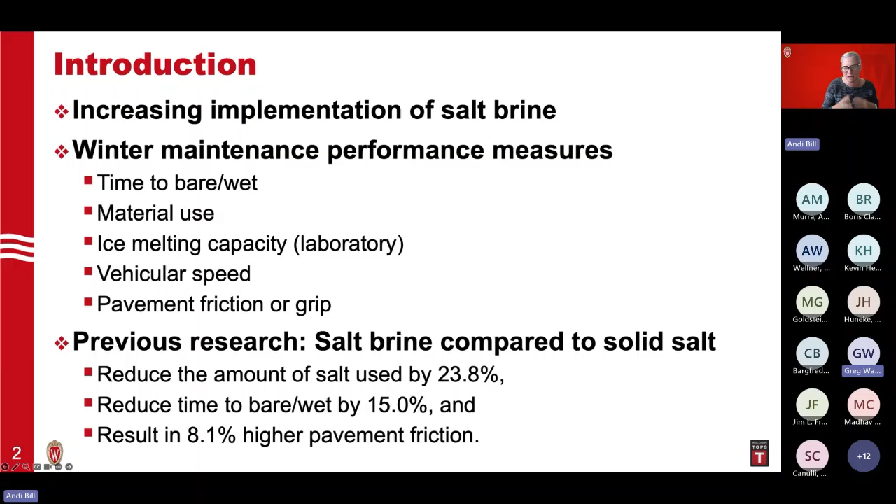Through our previous research, we know that salt brine compared to solid salt reduces the amount of salt used by about 24%, reduced the time to bare wet by about 15%, and resulted in about 8% higher pavement friction. These are mostly laboratory experiments that have been done in the past. There have been some field-based studies, but it was limited.

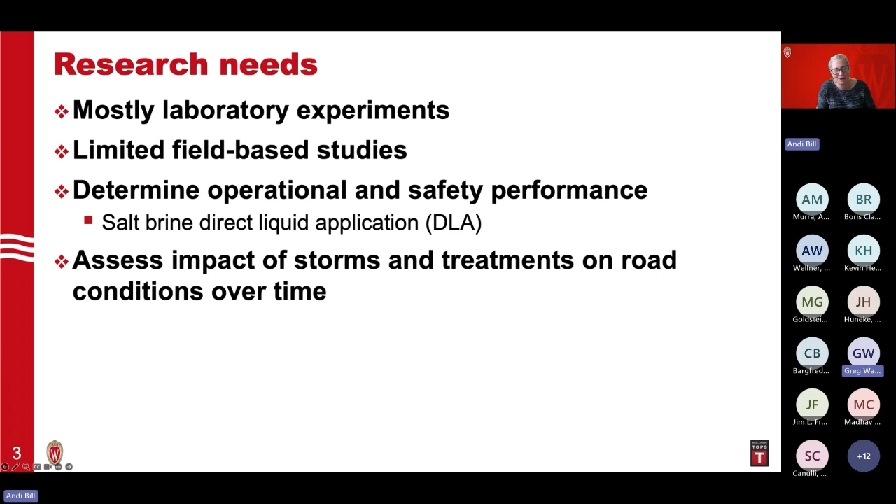And then determining the operational and safety performance of salt brine direct liquid application, DLA. We wanted to assess the impact of storms and treatments on the road conditions over a specific amount of time. Storms don't all just come at once, they go over a period of time, and so do our treatments, so we're looking at those through that time process.

So we had two parts where we compared salt brine DLA with solid salt. The first part was a literature review and agency survey. Thank you to those of you on the call that participated in our survey. Our research cannot be done without you participating. So we collected and synthesized information about differences of chemical materials, performance and safety metrics that are currently being used.

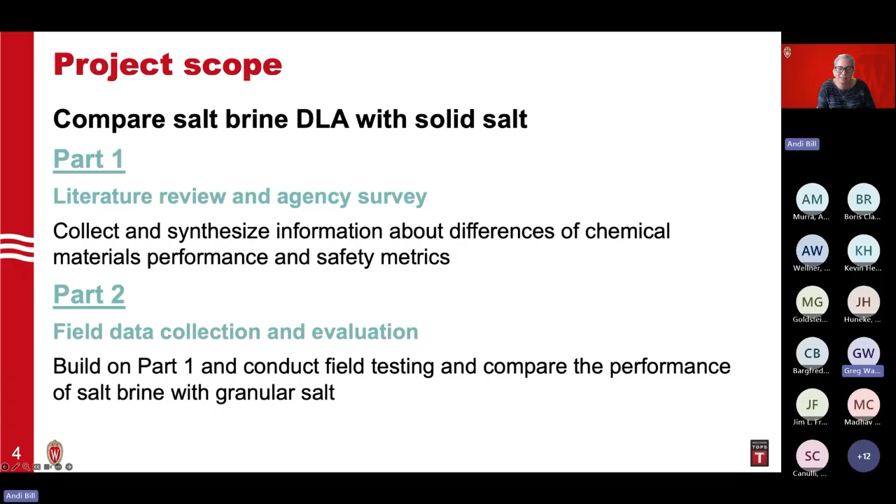Part two was a field data collection and evaluation. This built on part one. So we have the information that we're looking for. We want to go ahead and then conduct the field testing and compare the performance of salt brine with granular salt.

So we had our Clear Roads Technical Advisory Committee approve us moving forward with part two and help us throughout the process. Much gratitude to our Technical Advisory Committee for meeting with us throughout this project. So I'm going to take some time and go through our task one, our literature review, looking at winter storm impact, performance measures, and previous survey of practice.

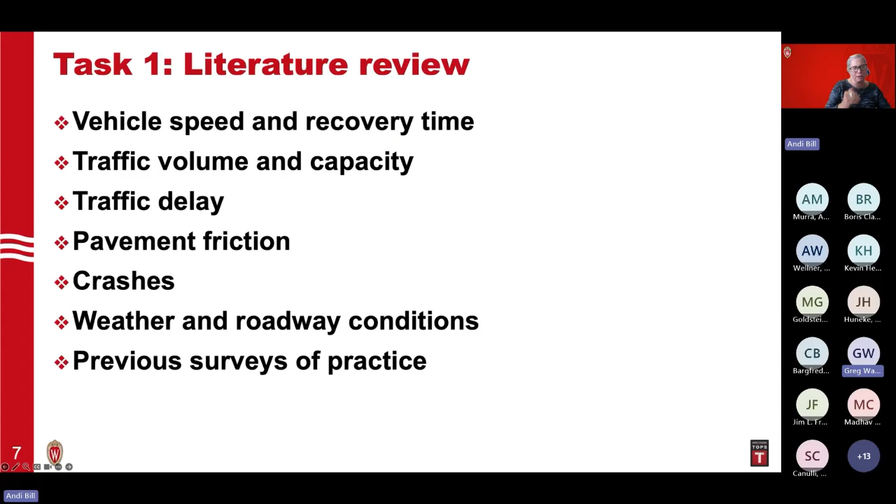So as we think about this, we looked at our vehicle speed and recovery times. We wanted to capture that, traffic volume and capacity, traffic delay, pavement friction, any crashes that were looked at through those winter storms, and then weather and roadway conditions, and then previous survey of practice. So we had all of those in our groups, spending some time to think about all of the literature that goes into each one of those topic headings and looking at it.

We asked, are you willing to share your data? So, what data are you collecting? Are you willing to share it? We had 16 responses that said yes, 10 that said maybe, and we didn't have any that said no. So that was a good start to that process.

The key finding is the most common use of salt brine direct liquid applications on the anti-icing. As we think about de-icing, thinking about DLA, pre-wet salt, solid salt applications, and then the shake and bake is a little less common. From an experience standpoint, the most experience was on the pre-wet salt. DLA, while it's definitely becoming more of a practice, is relatively less experienced still at this point in time compared to pre-wet salt.

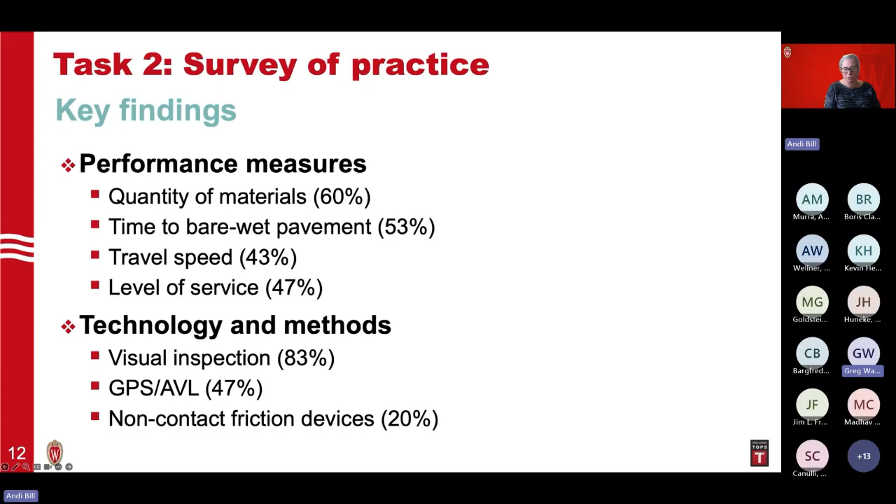When we asked the question with regards to what technology and methods you're using for these performance metrics, 83% said visual inspection, 47% used some sort of GPS AVL. 20% have non-contact friction devices that we'll look a little more closely at later on.

From the metrics monitored standpoint, we have 70% that looked at measuring that roadway condition. What are we seeing out there? 57% level of service, 50% traffic flow and speed, 50% safety, and 50% amount of materials used. And then this gets back to our willingness to provide some of that data through that survey.

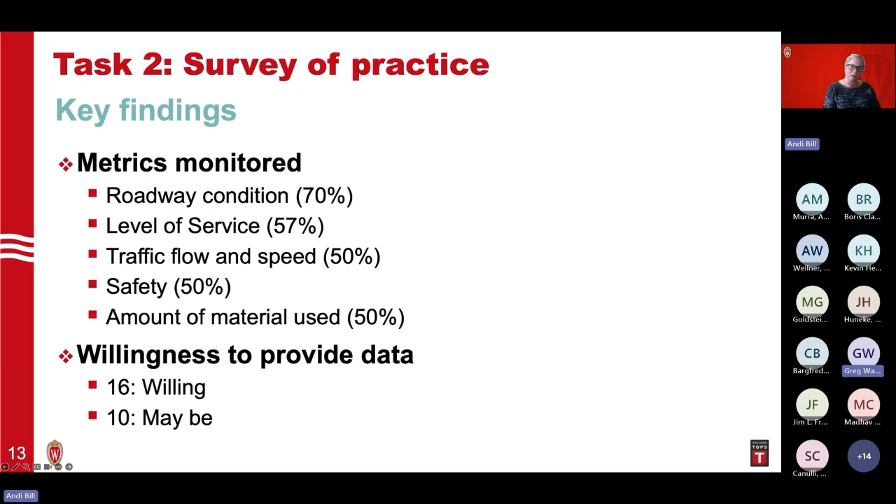As we moved on to task 3, this was looking at our field testing protocol. What are the methods that we're going to look at? Looking at our study and control routes, which I'll give a little more in depth, and then looking at the road weather information system and the AVL data, RWIS and AVL.

So our methods, we looked at 2. There's a study and control route comparison. This is going to be looking at a divided roadway, so it's under the same conditions. We're going to do salt brine in one direction and then solid salt in the other direction. We use the AVL data. We also collected friction measurements, vehicle travel speeds, and other performance measures for this comparison.

The other method that we looked at was the RWIS station data. We gathered friction data, AVL data, and looked at a time series for that RWIS, which I'll talk a little bit more about as we get into the data side of it.

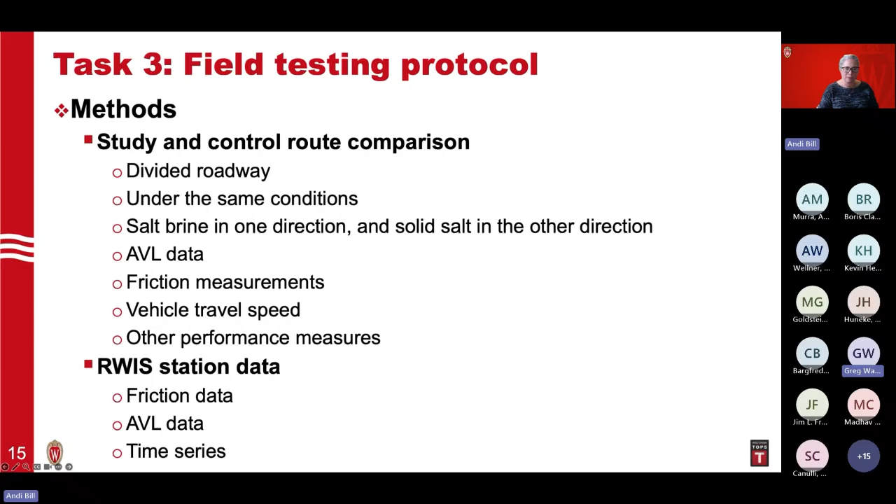So our required is our route information. What is the start and the end routes? This will be done just one time. What is the ADT, number of lanes, functional classification? This just kind of gets us started on it.

For the treatment, this is going to be done every storm. So our required for this is whether it was anti-icing or de-icing, the materials used on that. And then our desired was amount used and application rate, frequency of application, and that GPS AVL.

For each storm, we wanted to think about the storm start and end time. And then if we can, that pavement temperature at 60-minute intervals or range for every storm, air temperature, type of precipitation, and precipitation amount. The required for this was the start and end time and the pavement temperature. Then we had some desired as well for the rest of them.

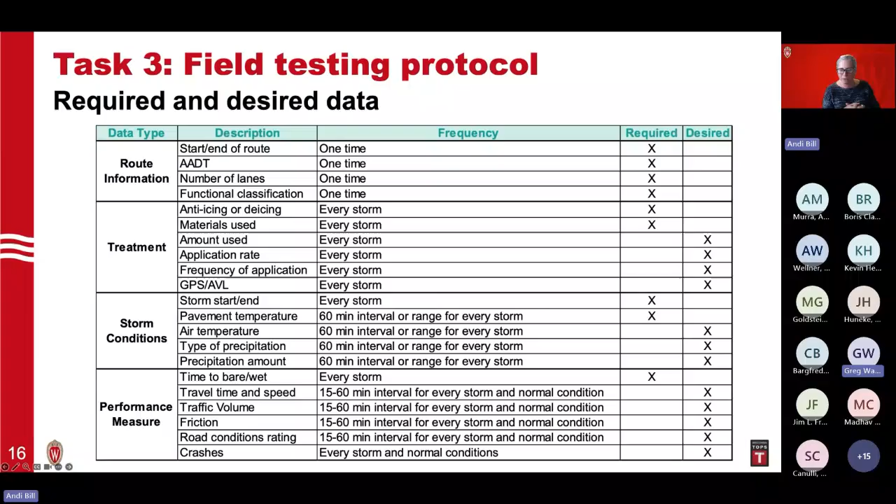In terms of performance measures, we looked at time to bare wet. We got that for every storm. And then our desired were the rest of them here. So travel time and speed, every 15 to 60-minute intervals for every storm, and the normal condition as well, so we can compare it against something. Traffic volume, friction values, road condition ratings, and then crashes within that. So looking at the storm and then also during those normal conditions.

So we used the survey of practice, and we reached out to those folks that said they were interested in maybe sharing that data and working with us. We also looked to agencies with known application of salt brine. And our Clear Roads project manager really helped with our outreach effort. These are our list of contacts that we went through.

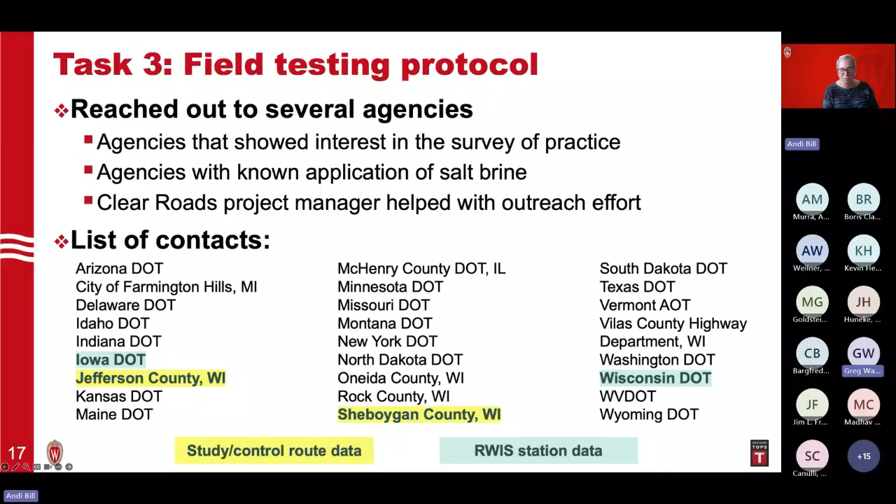So we used our RWIS station data from Wisconsin DOT and Iowa DOT. And then we did 2 study and control route data that I'll go more in depth with, Jefferson County and Sheboygan County here in Wisconsin.

So I'm going to go through the field data collection. We're going to be talking about our study and control routes, what those look like, and then looking at our RWIS sites. As mentioned already, our study and control routes were in Jefferson County and Sheboygan County. The materials that we used were salt brine on one side and solid salt on the other. And our performance measures were application rate, vehicle speed, friction, and time to bare wet.

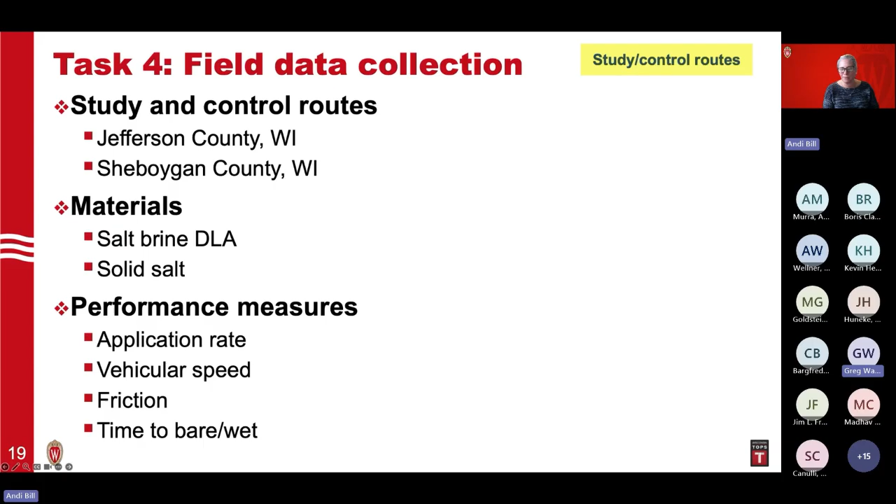This was our Route 1 here in Jefferson County. It's the Rock County line to Old 26 Bridge. It's about 3 miles long. You can see it in the bottom right-hand side. That's our map for that 3.3 miles. You can see the start and the end on that side. It is a 1 truck capacity. Brine is 800 gallons. The solid salt's 14 to 16 tons.

You can see in the picture, in that red call-out box, where we had solid salt on the black side, and then on the pink side is our salt brine. So again, under same conditions, one side of that divided highway is putting down solid salt, and the other salt brine. For our data collection, we used the MARWIS friction device. The data is auto-uploaded via cellular connection, and we had 5 storms that we looked at on this route.

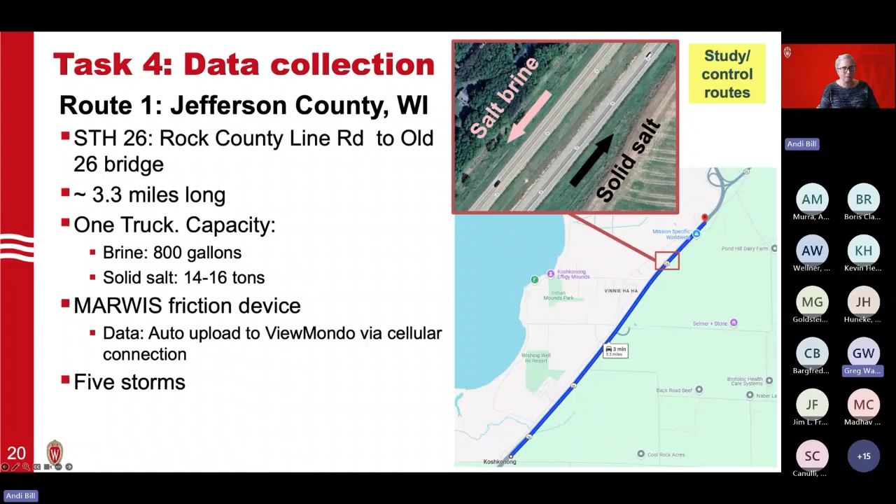For our Route 2 in Sheboygan County, this was located on State Trunk Highway 23 between County Road P and County Road O. It's approximately 3 miles long again. A patrol vehicle was equipped with a MARWIS friction device, and data was automatically uploaded as well to the same site. For this site, we collected information for 6 storms.

So you can again see the map there. And then in the bottom, you can see our solid salt is on the top of our picture here, and the salt brine on the bottom of the picture.

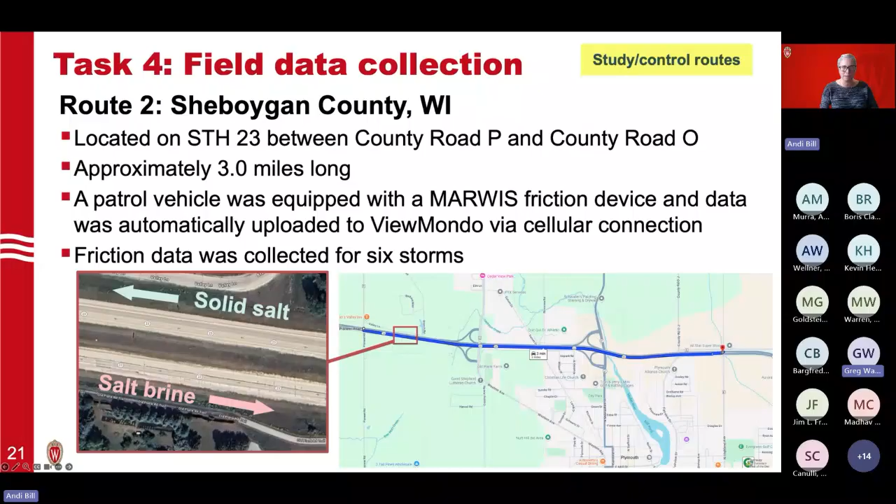So for these routes, we had online storm reporting data. Thanks to everyone that's able to help us. I know that data collection is a hard part. We can't do any of this work without you guys to be able to look at this data.

The online storm report data has the following information: storm start and end times, dates, type of precipitation, accumulation in inches, roadway surface conditions, pavement temperature, 23% sodium chloride brine in gallons applied, salt brine application rate in gallons per lane mile, solid salt dry in tons, solid salt pre-wetted in tons, any pre-wet agent, solid salt application rates, application frequency, the time to bare wet accomplished, and any comments or file uploads.

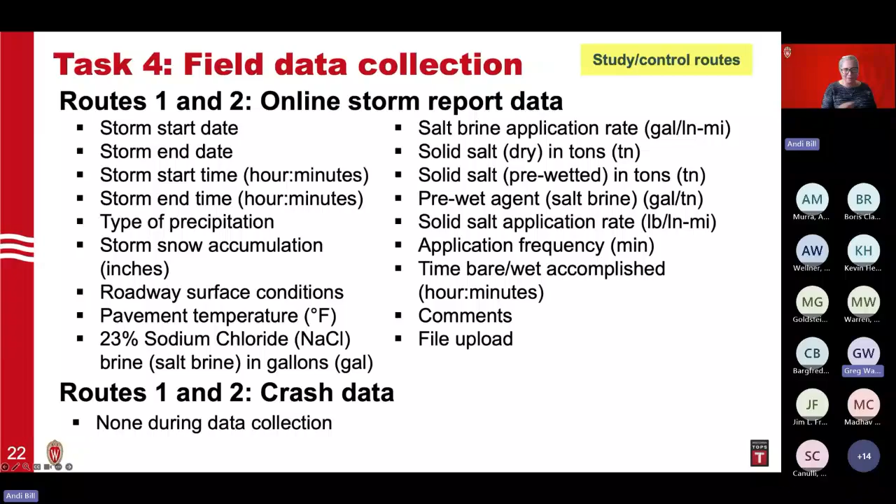We did want to look for crash data. Lucky for us, there was none during that data collection, so there was no crash data at this point to look at. That's good from a safety perspective, a little harder when looking at some of this other work, but I'm glad we didn't have any crashes during the data collection.

Here is the MARWIS system, an advanced road weather information sensor. It's put onto the back of a vehicle, a patrol car, or a truck, depending on the setup. There are pictures on the right. It has temperature and humidity sensors, status LED, connection plug, pyrometer, 4 transmitters and 2 receivers, and that's how it all works.

This is able to give us an equivalent friction value. Obviously, we're not doing a skid test on this roadway—we're doing it through these information sensors—but it's able to at least let us compare relatively against each other to look at that.

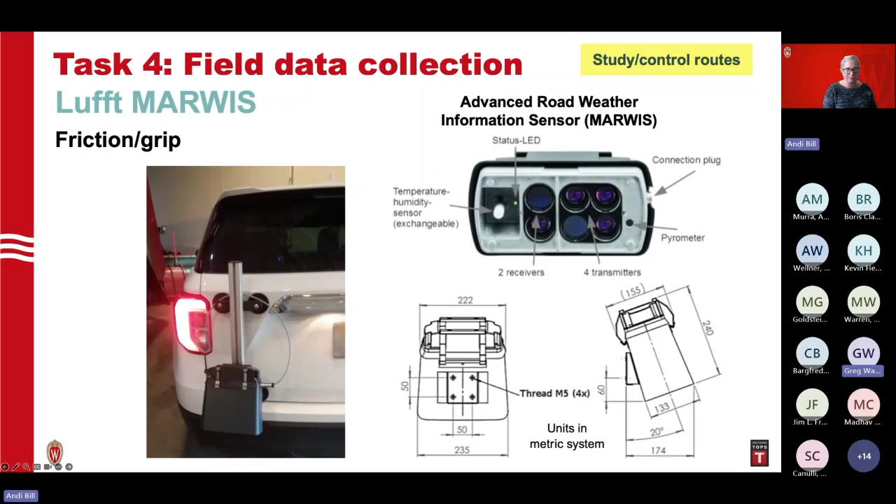As we moved into our RWIS stations, for Iowa DOT we had the 2019 to 2023 winters. We're able to look at those. We have RWIS 24 in Iowa City on I-80, RWIS 5 in the city of Ankeny on I-35, and RWIS 71 in the city of Grimes on Iowa 415.

For Wisconsin DOT, we had the 2024-2025 winter, with 4 stations listed: the village of Hortonville, State Trunk Highway 15 at County Highway JJ; the city of Appleton, I-41 at State Trunk Highway 441 southbound; the town of Tipler, State Trunk Highway 70 at State Trunk Highway 139; and the city of Green Bay, I-43 at the Leo Frigo Bridge.

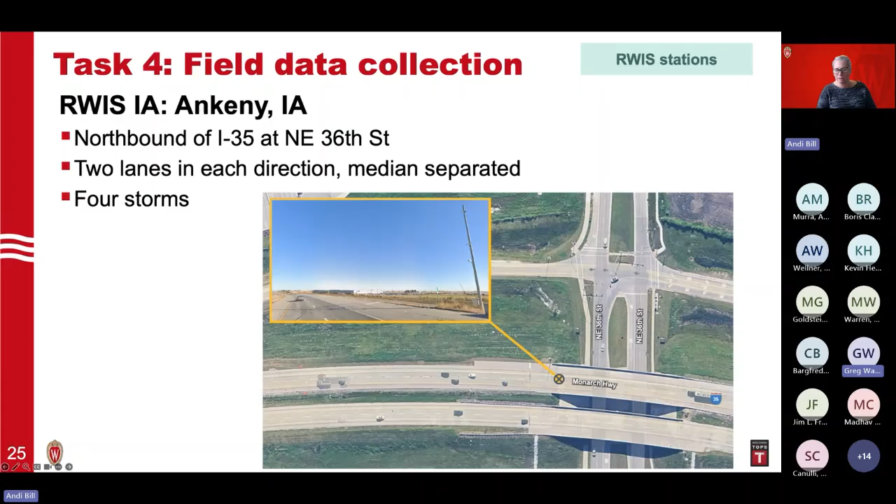Here you can see Ankeny, looking at it on the Monarch Highway, with the picture and call-out box from overhead Google Maps. This is northbound I-35 at Northeast 36th Street, 2 lanes in each direction with a median separated. We had 4 storms that we looked at for this location, which we'll talk more about on the data side.

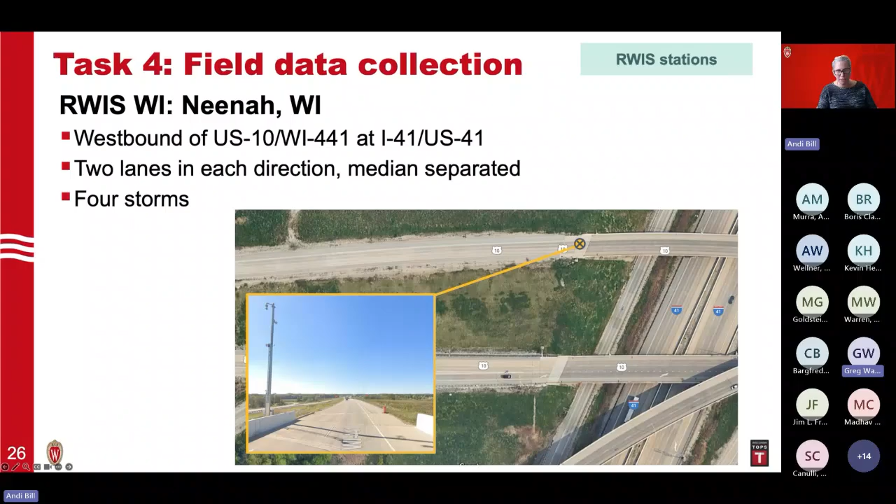In Neenah, we're able to look at this location—westbound US 10, 2 lanes in each direction, median separated again. This also had 4 storms. You can see the location right next to the bridge on this side.

As we think about the RWIS station information, we want to highlight the date, time, friction, ice percent, and surface temperature. Those are the major data points we used, but there's other data associated with it too. Hopefully as you're thinking about this from your area, you're getting some information about how you can use this, and if you have opportunities to look at data through your own RWIS stations, hopefully this helps.

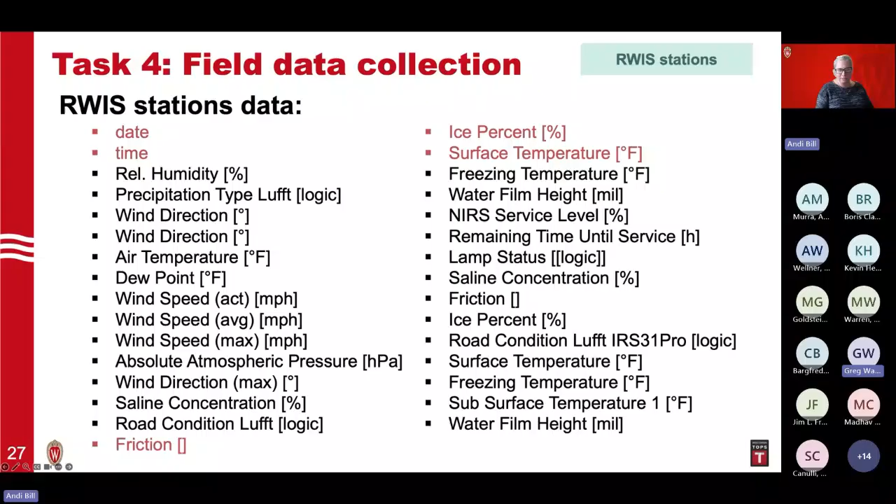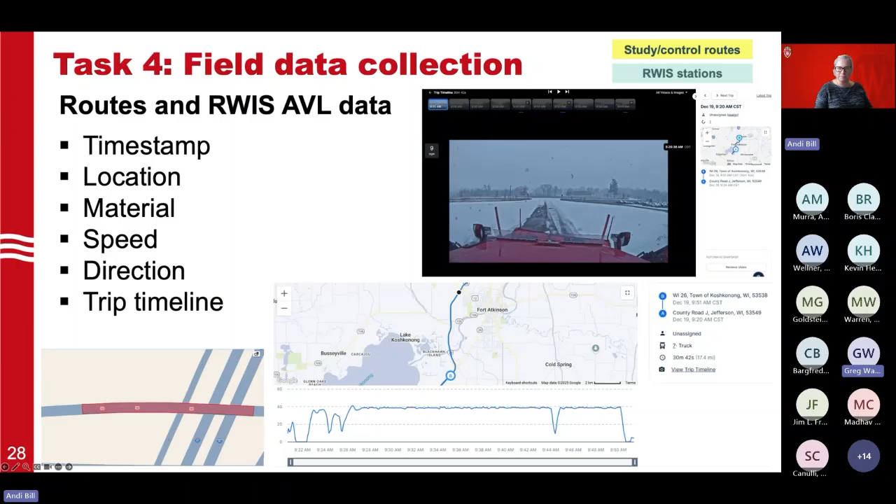So we did our method, we looked through, talked to a lot of folks, tried to make sure we got things set up a little bit, gathering all the data, working with everybody to make sure we're comfortable on what data is being collected and how we're collecting it, why we're collecting it. Those are really important things. That kind of helps with that buy-in and that feedback loop.

And then once we have that, moving into our data analysis. So I'll start with the study and control routes and look at it.

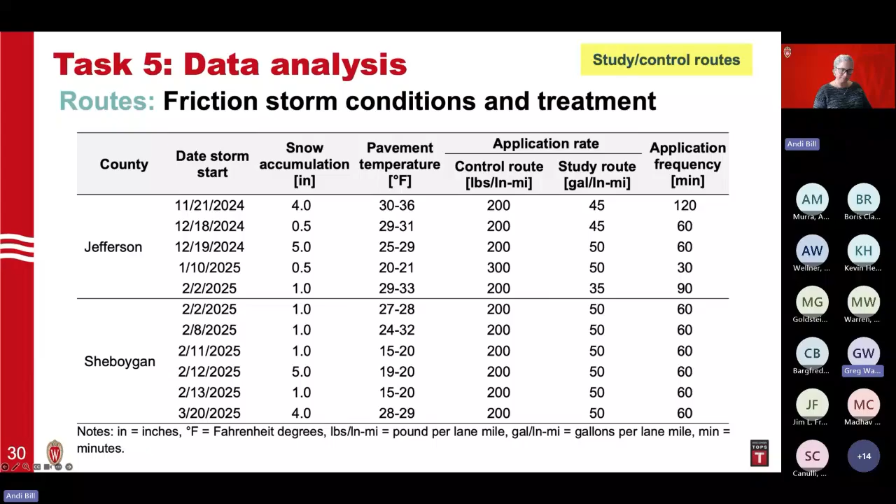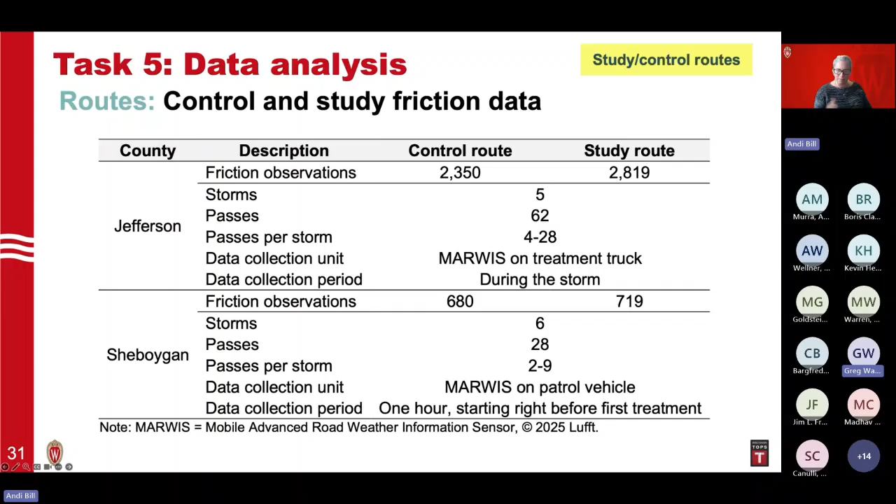We have 6 storms, 28 passes, between 2 and 9 passes per storm. The MARWIS unit was on the patrol vehicle for this one, and the data collection was 1 hour, starting right before the first treatment, and then moving forward from there.

So each pass would have multiple friction measurements. We did a nested data structure, trying to do the route type, the pass, and then the friction measurement to be able to look through that. We did a mixed effect approach.

We wanted our fixed effects to be the route type, and our random effects were our pass and our friction measurements. Then we did a mixed effect meta regression modeling. Don't worry, I won't quiz you guys on any of this stuff, but just be able to see how we do this for repeatability. The heterogeneity of each pass is accounted for.

We want to make sure we know that things are going to change, and so we want to be able to account for those as best as possible to compare for those.

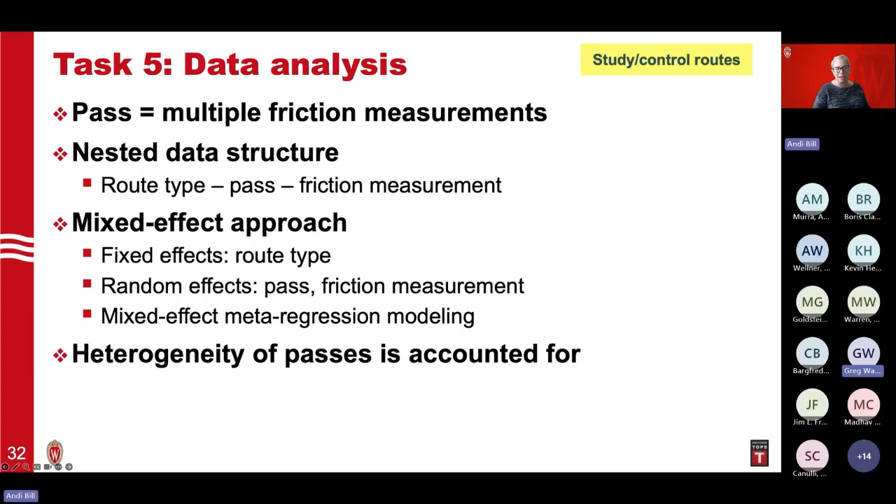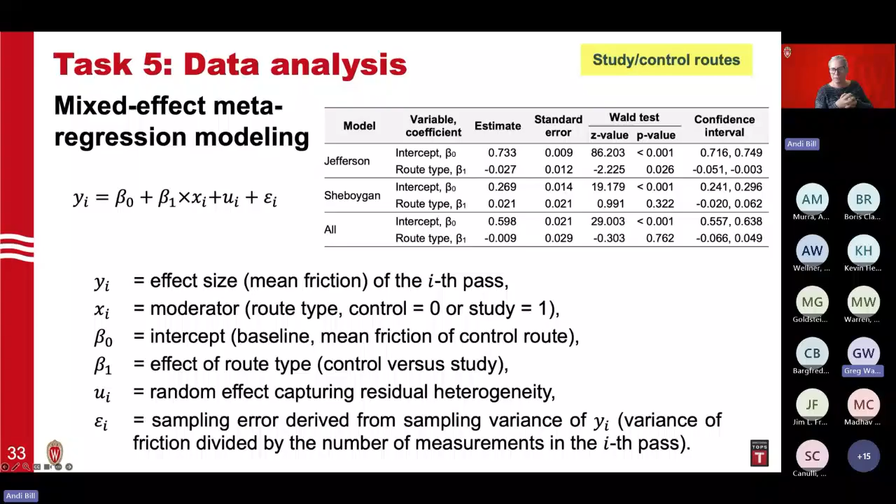What we can see here in the table at the top is that we have relatively small standard errors, which is really good to show how this is looking. And then the p-values are low, so good work on that.

And we didn't see a statistically significant difference between the friction of the control and the study routes in Sheboygan County.

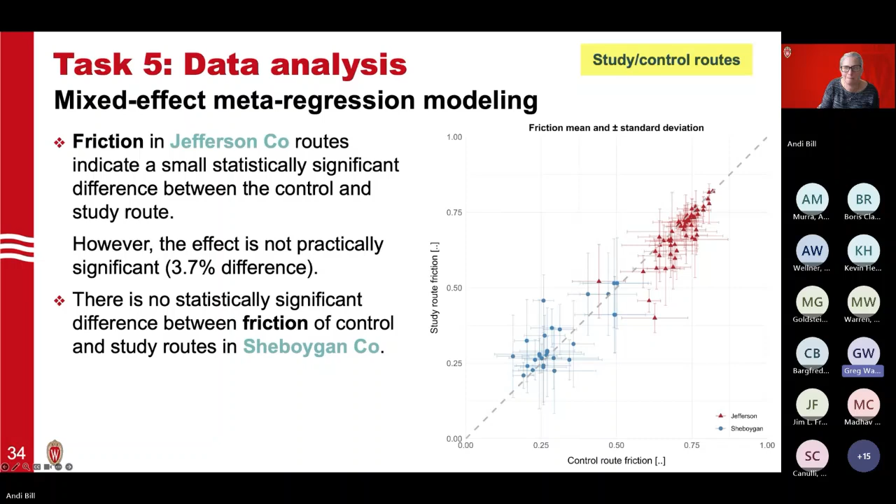So the mean friction differences between the counties: as you can see, Jefferson County was higher than Sheboygan County. We had between 0.4 and 0.8 for Jefferson County, and then Sheboygan was between 0.2 and 0.5. That's where these kind of differences in the calibration come in. What we saw, though, is for each county it was consistent measurements. So we can do relative comparisons between the study and control routes for each county, but maybe not pulling them together, just because there's differences in those mean friction values between those two counties. Hopefully that makes sense.

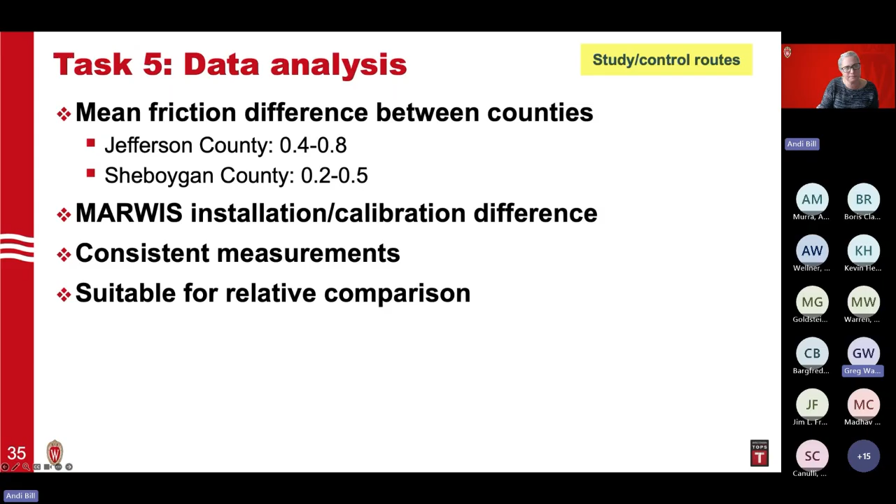One thing we wanted to look at a little more in depth was vehicle speed and travel disruption. We used the National Performance Management Research Dataset, NPMRDS, which is an acronym I have a really hard time getting right most of the time. This was to look at the travel disruption.

This was interesting for me thinking about speed. Everybody does want to be able to travel at the speed they were going before the storm. But as we think about storms, from at least a safety aspect, we actually do want people to travel slower, making sure they have enough time to stop and be aware of things like the plows out there. So we wanted to examine this.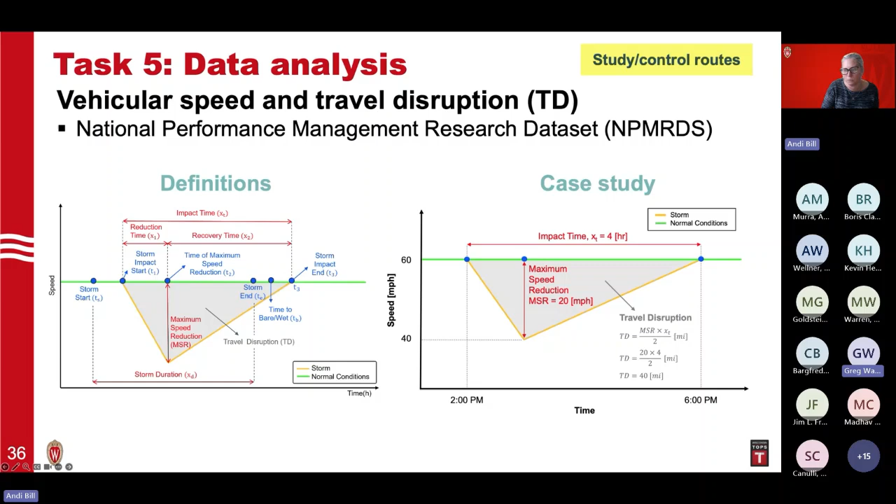It'd be nice if it was always clear, beautiful lines like that, but as we look at our data, we're not going to have that. But we can kind of smooth it out and look at it here.

So this is looking at Jefferson County, our study and control routes for 3 storms. We can see that green line is our normal conditions again, so that's a historical average for that speed for those time periods, making sure we're examining it with that.

And then you can see the yellow with those storms. You can see how the storm speed actually goes down for the beginning part of it and then comes back up. The red lines are the truck exiting, and the area underneath that curve is our travel disruption with it. The red dash line is that maximum speed reduction.

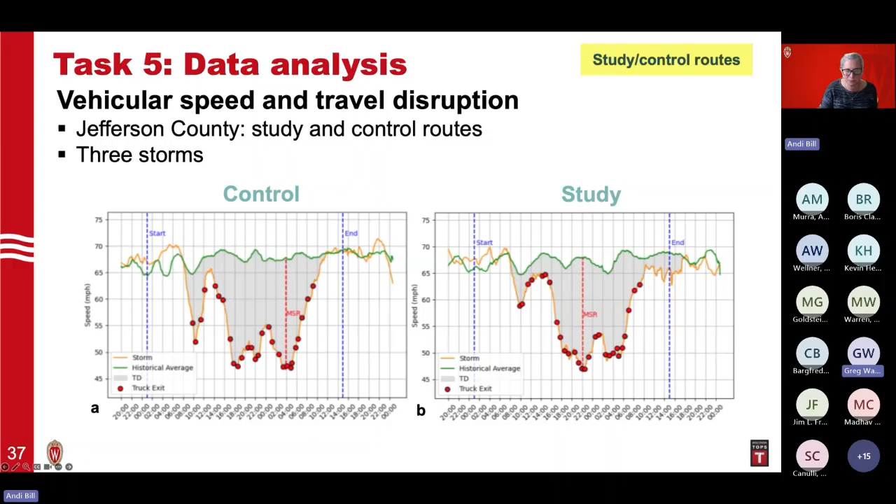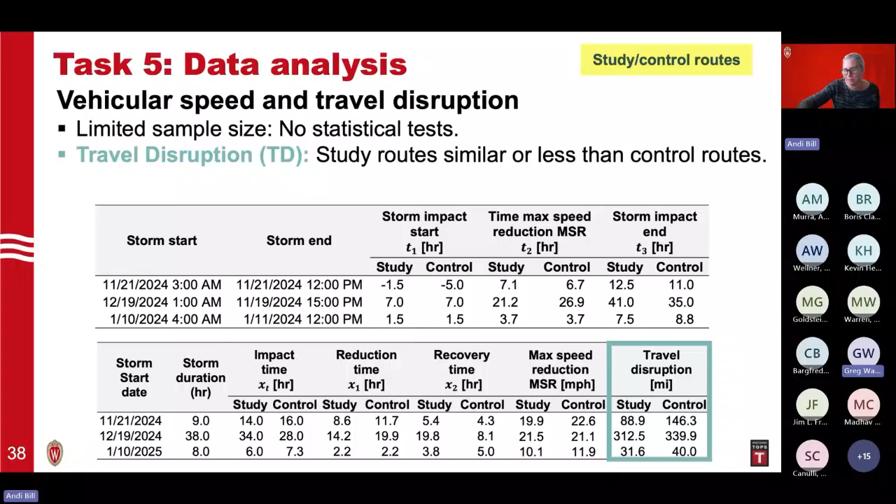You can kind of see this process. I won't go through each part of these tables, but it's our storm impact time, our maximum speed reduction, the ending on it, and then that travel disruption between the study and control routes down below for those 3.

We had limited sample size for our time to bare wet, so there was no statistical test for that. You can see here that between our control and study routes they are similar as well. There's not any huge differences between our study and our control routes.

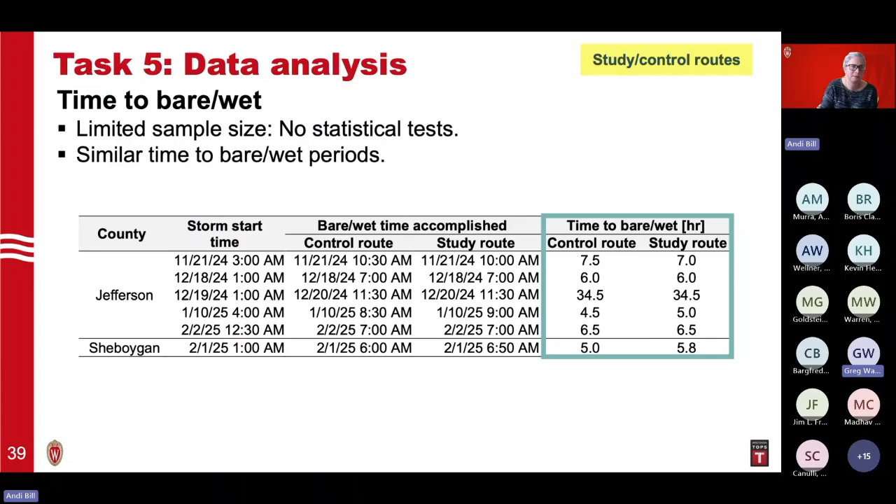So our control and study route limitations: we have no control data. This is locations based on available friction data. Materials may include solid salt, and we're looking at it.

As we think about being able to say whether we had those stations, as we think about those RWIS stations and looking at those, do they provide a numerical value of friction? Most provide just categorical friction values, low, medium, and high, and some of those.

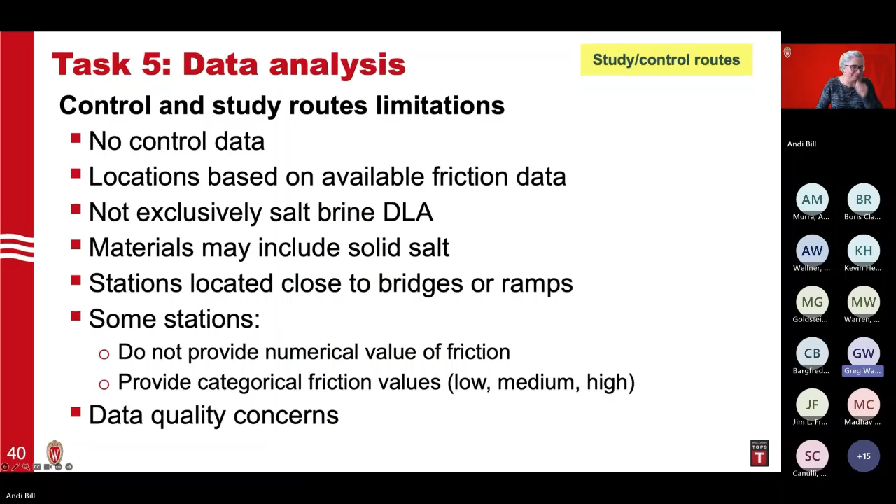All right, so as we move into the RWIS stations and look at I-35 and US 10 that we talked about before, we're going to do some of the same type of work here. We're going to look at our baseline, then our speed, and then when the treatment happened and then those friction values.

So on A versus B here, on the left-hand side we're looking at speed and friction values. On the right-hand side we're looking at wind, air temperature, and precipitation. You can see when the treatments are done with those light blue lines on the left-hand side. Kind of the same storm, same time period, just different data sets, examining it.

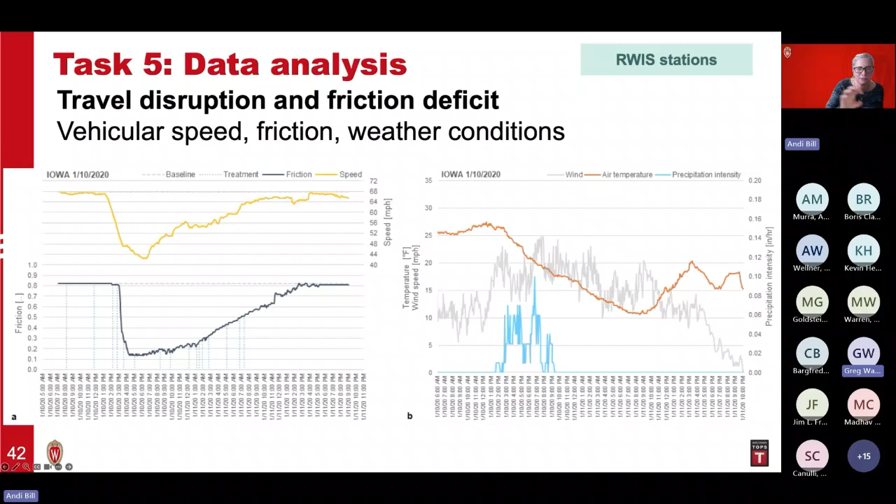We did the same type of calculation for travel disruption and friction deficit as best as possible. So when friction decreased, the vehicle speed decreases. Good, glad that that's happening for our roads. It's good for people to be able to be aware of that.

Periods under a friction threshold served as measures of risk or safety. It's very valuable information to monitor for mobility and safety performance as we move forward with this. So you can see our travel disruption and our friction deficit with those, being able to look at that.

And then this is the hours with the friction less than 0.8, 0.6, 0.4, and 0.2. We can go back and forth about what is the right friction value we want to use for that deficit, but being able to look at those through that process.

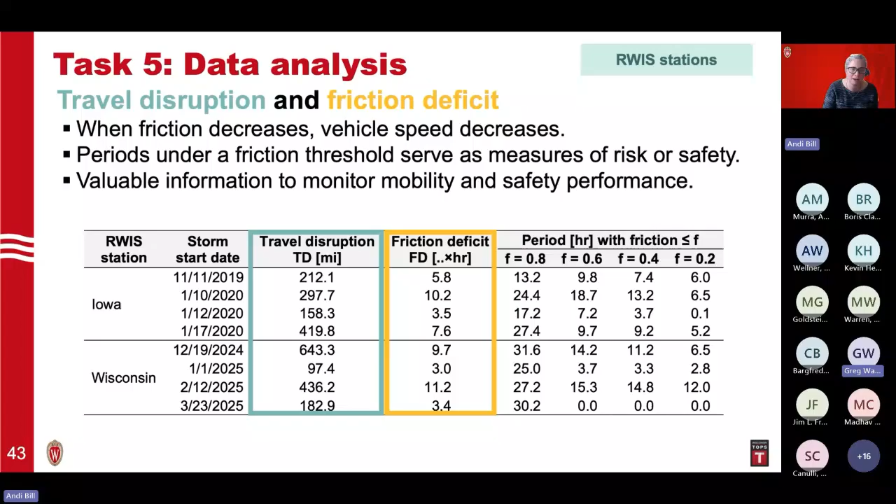Here, these are our friction values, so you can kind of see that baseline. This is starting at a little above 0.8, and then you can see it drop down. You can see when the treatments occurred, and nothing that's surprising, but when that treatment occurs, those friction values go back up, right?

So we're able to see those jumps as we go through. Treatment's here, and those friction values go right back up. Treatment occurs here, those friction values go right back up. So an interesting way to look through this and examine it for that treatment effect.

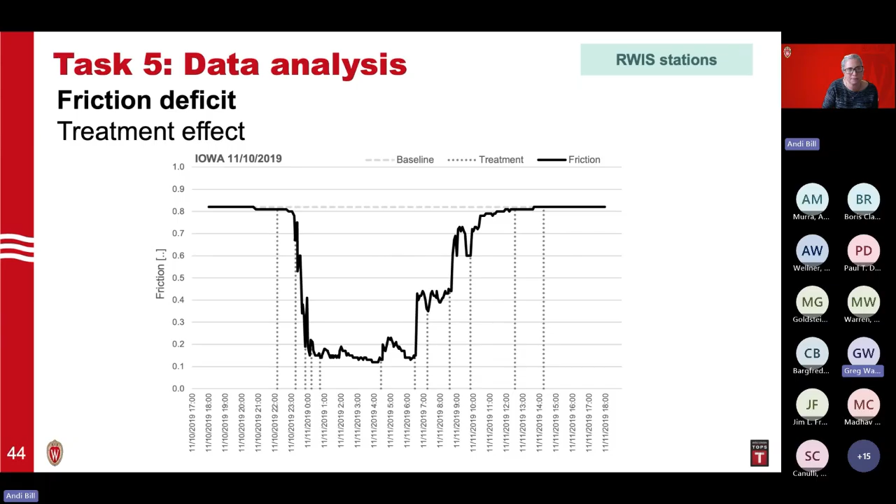Our RWIS station data limitations: we have no control data. It's just out there. We're not looking at control and study routes. The locations are based on whatever friction data is available out there.

We think they're not exclusively salt brine deliquescent applications. They may include some solid salt out there. We don't have that specific control versus study route breakdown like we have in those other characteristics. They may have a bit of a mix, but it's still able to give us more information to look at.

Stations located close to bridges or ramps also add a little more complexity in terms of our friction values.

Some RWIS stations did not provide the numerical value I showed in that last screen. Some had categorical friction values of low, medium, high. So we want to look a little more carefully at those, along with some other data quality concerns.

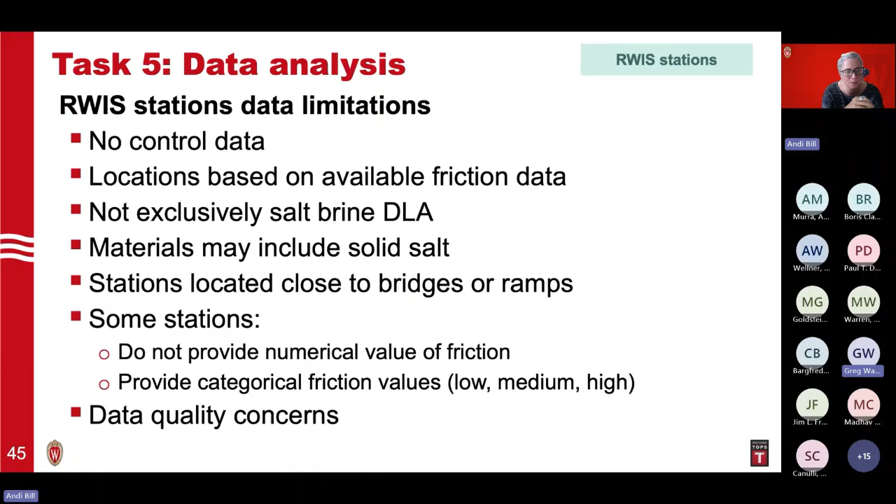Moving to our data analysis, I know I'm taking a lot of your time, so hopefully I can summarize and show some infographics and get comments back. Our study and control routes in Jefferson and Sheboygan had statistically similar friction values, similar travel disruption, and similar time to bare wet pavement.

Application rates, as expected with salt brine, used 40 to 72% less salt. The big key point is that salt brine direct liquid application and solid salt have similar performance while using less salt, which is better for the environment, and the benefit-cost ratio is better as well. The RWIS stations had travel disruption and friction deficits that we were able to assess.

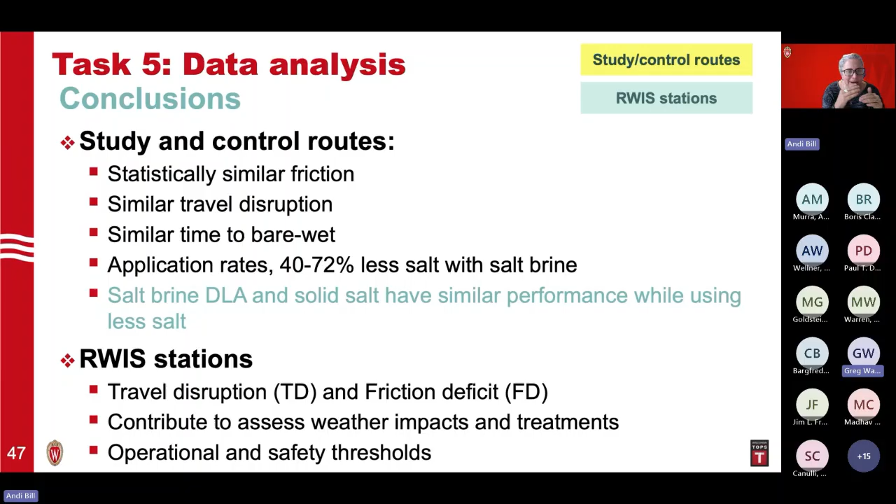This contributes to assessing weather impacts and treatments. It's helpful for us to think about operational and safety thresholds as we consider performance metrics and how to move forward.

Our final deliverables include this webinar, which I've been coughing through, I apologize for that. We have a final report documenting the entire research effort. I'm going to show the infographics summarizing key findings, and all final deliverables will be available on the Clear Roads project website under project 22-04.

As we looked at our first infographic, we got comments back that it was helpful but very wordy and not suitable for the general public. So we had a picture looking at the Clear Roads project: weather conditions, what the study and control routes were, frequency and application rates, pavement friction, and what we looked at for performance measures.

We went through and tried to make it a little easier to grab and look at. These are our comments on the second infographic, and we'd love to hear from folks on this one too, really highlighting that the amount of salt used is less, 40 to 72% less, while everything else is very similar.

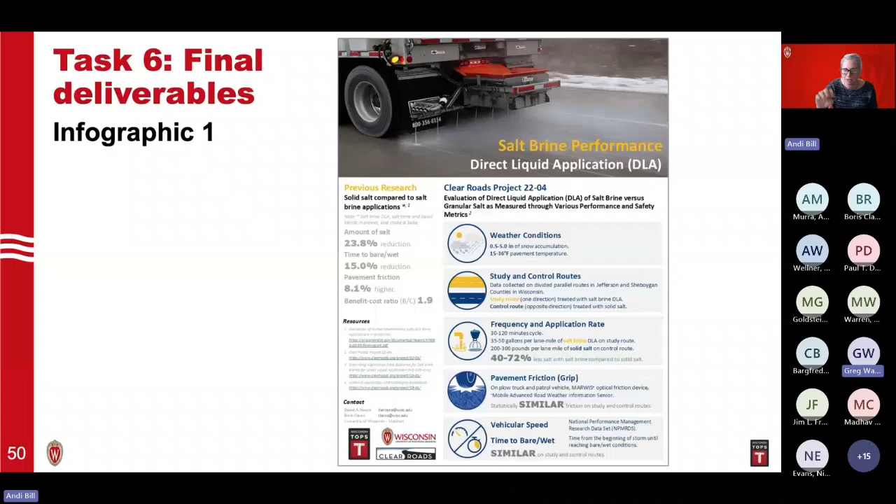We gave information about the project report on the right hand side: what were the application rates, how do we measure pavement friction, how do we gather vehicle speed and time to bare wet. We tried to take a version with a bit more information tucked in and make it simpler, moving forward with this second infographic.

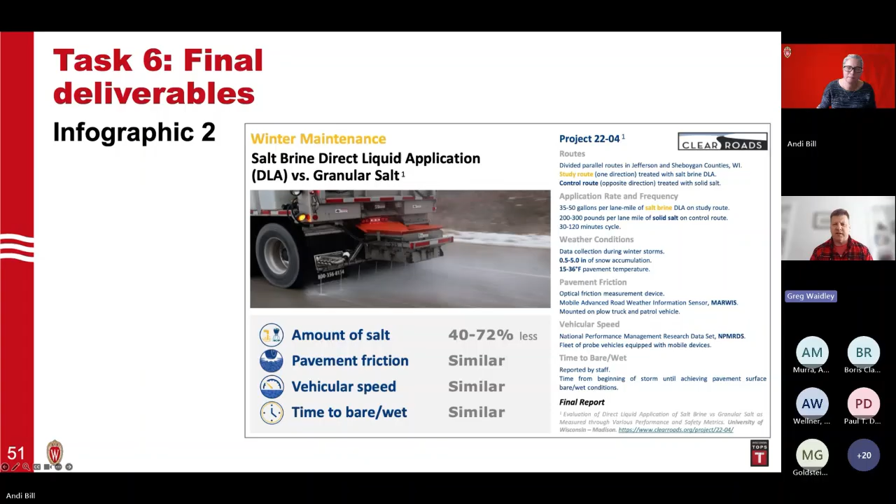All right, this would be the time to open it up to anybody who's got any thoughts on any part of the presentation or the infographic. Oh, we went away from the infographic. There you go. Cool. Sorry, I wanted to be able to see the comments as they're going through. I know. Yeah. Patty Caswell has a question.

Thank you. Yeah, I had a question on the graph that showed basically the test results on the speed and the storm. The truck exit, I'm not sure what that means. Does that just mean when the truck left the road and stopped applying, or those red dots on the graph? These? Yeah. Yeah.

Boris, do you want to jump in and explain that specific definition of truck exit? Yes. The truck exit basically means when the truck ended applying material on the routes. Yes. Okay. Thank you.

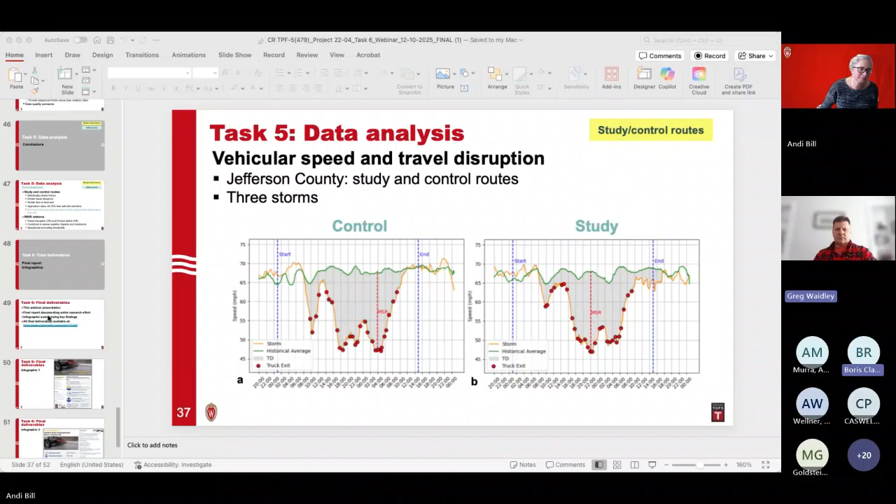Craig Bargfrede from Iowa has asked the question, do you have an infographic that uses the data from the Iowa DOT instead of the Wisconsin DOT? So, Boris, you want to talk a little bit about that for me? The first infographic was basically a summary of all the data that we had from previous projects and the current project, right? So we wanted to condense all the information gathered from different projects that we have conducted in this new project. And infographic 2 is basically just summarizing the overall results.

I know that we don't mention the RWIS results in these infographics. We felt that it was difficult to convey some of the findings from the RWIS stations, and we basically provided the data that was available from the control study routes. And part of that too is just because we weren't exactly sure what else was being put down on those routes at those exact times, Boris, right? We didn't want to confuse anything because of possible data quality issues or us not understanding that data quality, correct? Yeah, that's correct, because on the RWIS locations, it wasn't direct liquid application.

It was other treatments, including pre-wet material, yes. Since the project specifically focuses on direct liquid application, that's why we emphasize that particular study control analysis in the infographics. We think that the work that we did with the RWIS stations is helpful for the future, but in terms of being able to fully compare direct liquid application to solid, it was harder to do in the infographic.

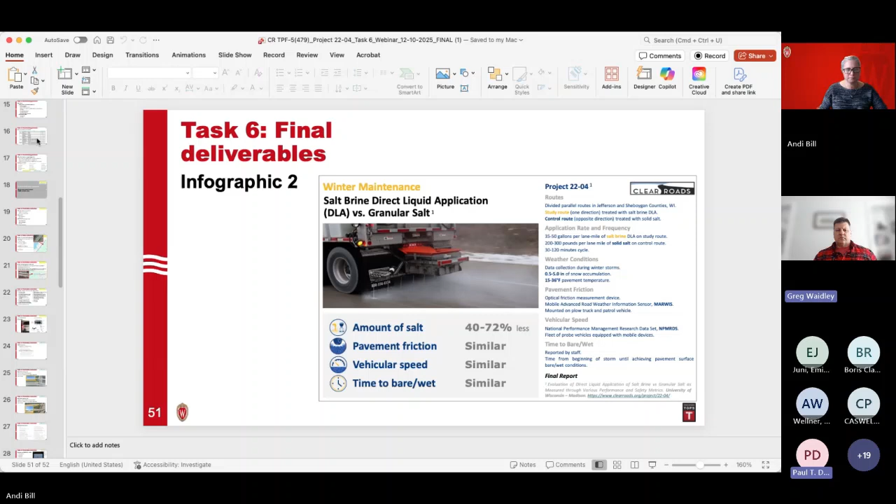We use brine quite a bit for pre-wetting and wetting our salt, but we don't do a lot of direct liquid application during a fight. So that's one thing that we're trying to push towards. I did have another question, Andi, on cycle times for trucks that were doing direct liquid application. Can they not travel as far as a salt truck before they have to come back to the shed and fill up again? How many miles can they travel versus a salt truck on lanes treated before they have to come back and fill back up?

Great question. Boris, I know I'm going to put you back on the spot. Do you remember from our previous study when we looked at some of that capacity? I know you did the benefit cost, so I don't know if we know from this study, but from our previous studies, you might have some information.

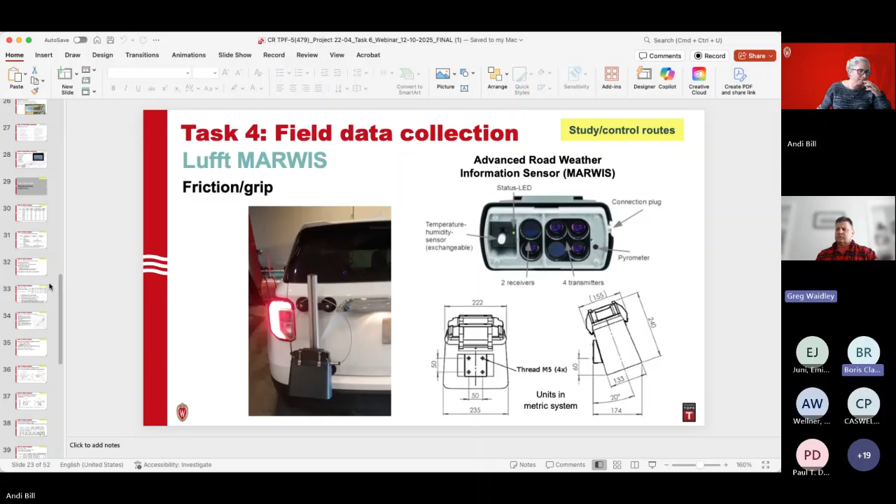Yeah, well, from this study, Jefferson County and Sheboygan County were very helpful in the process by modifying some of the routing for the purpose of the data collection. So they were close by to one of their shops, so as soon as they left the shop, they were able to consistently treat the route. So more or less, that was the setup that we had.

And usually, for instance, Jefferson County has a 50-minute to 60-minute interval routing for their particular trucks. In terms of Sheboygan, I'm not that familiar. Usually, they just modified their routing for the project. But in general, Jefferson County has a 50-minute cycle for their trucks that are equipped with both salt and salt brine.

All right. Paul, does that at least sort of answer your question? I think Paul, you were getting at just in general, right? So what is the capacity for cycle times for a brine truck compared to a salt truck? Yeah, and maybe miles might be more intuitive to me than time. How many miles was a brine truck able to treat versus how many miles is one salt truck able to treat? Okay. Yeah.

Thanks, Paul. We can take a look at that. I don't think we have that readily at our fingertips. And Paul, that project that we did on plow cycle times, does that offer any assistance? I'd have to go back and look at that. Just a quick comment: it's going to all depend on how much material the truck can haul, how many gallons, how many pounds of salt, and what the application rate is, and you just do the math on that, and it'll give you the distance.

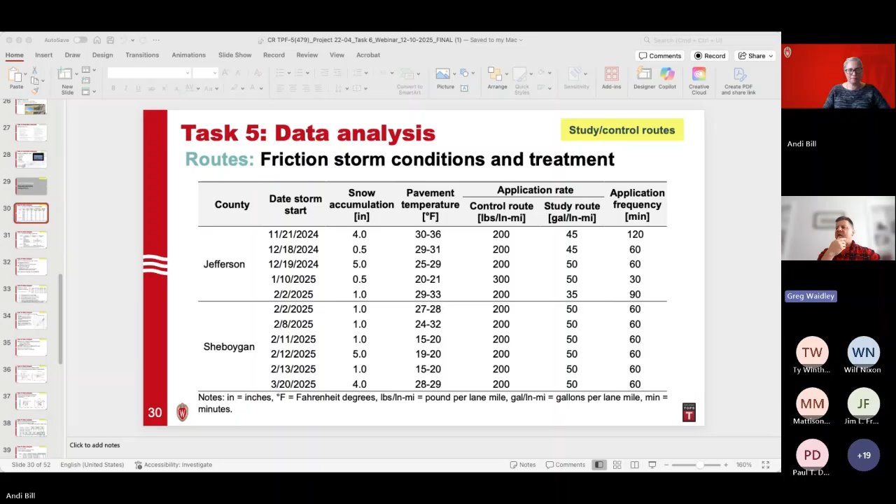Okay. Anybody else? Hey, Greg, it's Joe Thompson. Joe T. Yeah. The two sections that were in the data collection, I think one was 3 miles and the other one was 3.3. But I think there'd be some value in just having that be part of what was on the one pager, so people realize that's not the entire beat. Not that that necessarily makes a difference, but that was the control, or maybe it would add confusion. I don't know, but that was just something that jumped out at me.

Thanks, Joe. And on that right-hand side, we kind of talk about those routes. We can put them in parentheses, what those miles were between that and Jefferson and Sheboygan. Thank you.